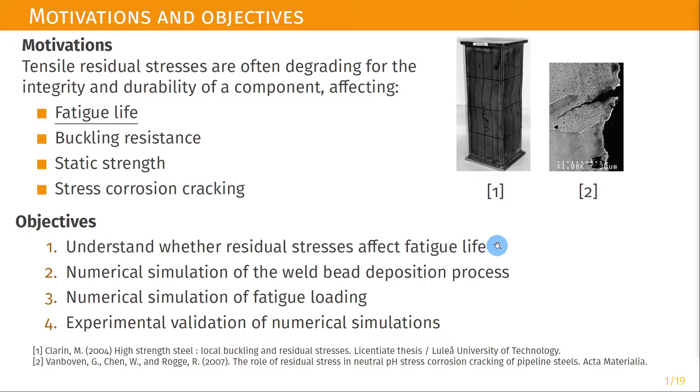In the following, two case studies will be presented: a welded joint and a notch specimen. In both cases, the effect of residual stresses on fatigue life will be investigated. Specifically for the welded joint, both numerical models and experimental results will be presented. On the contrary, for the notch specimen, only some experimental results are available up to now.

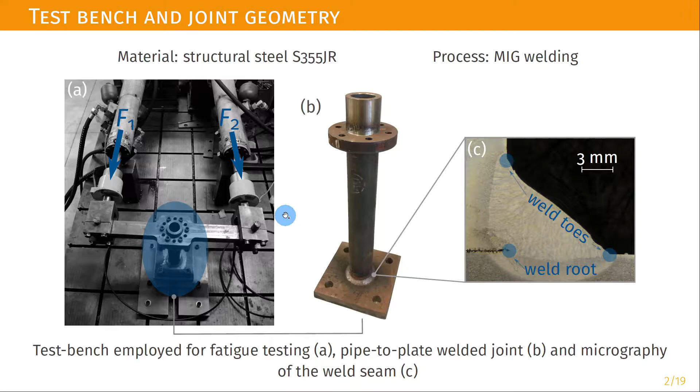Fatigue tests were carried out by means of a homemade test bench with two independent actuators, so we could create pure bending, pure torsion, or a mix of them. For this research project, we are dealing specifically with fully reversed pure torsion and pure bending loading.

In order to study the effect of residual stresses, it was necessary to relieve some specimens. For this reason, a temperature of 630 degrees was maintained for 4 hours with subsequent cooling in the oven. Hardness and microstructure were analyzed to ensure correct treatment.

In this graph, you can see the hardness curves around the weld seam region, both for as-welded and stress relief specimens. The hardness values were plotted over a normalized indentation distance, the definition of which can be observed at the top left corner of this figure. As can be seen, the hardness decreases after the heat treatment and settles down to values traditionally expected for a stress relieving process of structural steel.

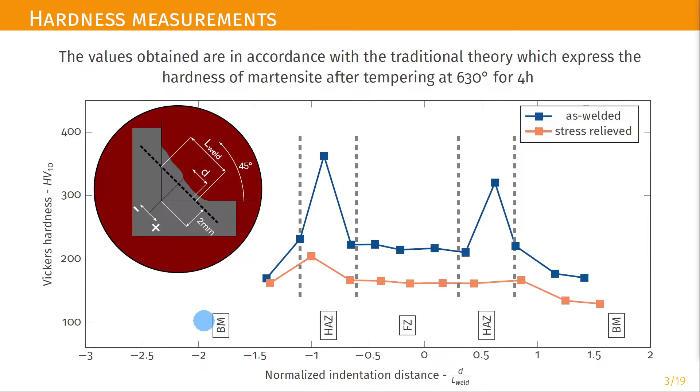For the sake of clarity, only hardness measurements have been presented here. However, even from a microstructural point of view, differences were found due to the thermal process, in particular grain coarsening close to the weld seam region.

Alongside the fatigue test, a numerical model was developed to determine the residual stresses that arise as a result of the welding process. The model uses an uncoupled thermo-structural simulation, as you can see from the first two images: the thermal analysis and the structural analysis.

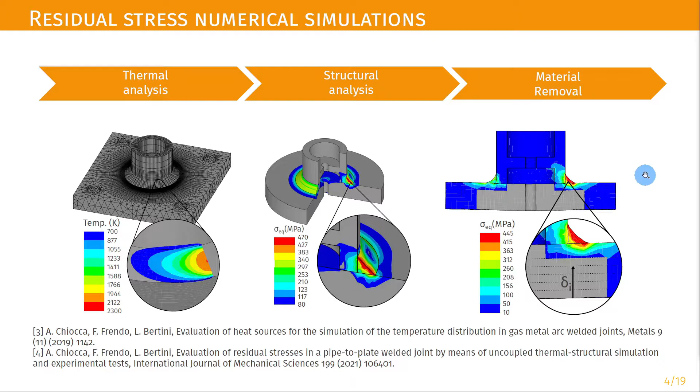This was followed by a material removal model to confirm the correctness of the results. Basically, results of relaxed strains around the weld seam were compared numerically and experimentally. These strains were experimentally measured using strain gauges and by incrementally drilling the specimen from the bottom of the plate after the welding process.

To simulate the thermal load deriving from the welding process, a constant initial temperature method was implemented. The thermal process was initialized by activating a volume of elements at a starting temperature Ti, which is the only parameter this method needs to work properly.

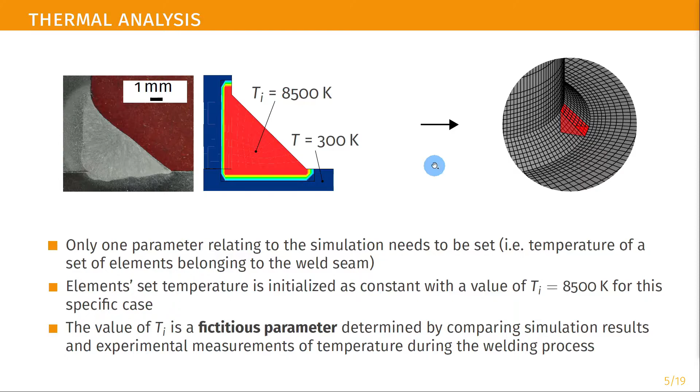The value of Ti was set for this particular case at 8500 Kelvin. This value has been obtained from the comparison of experimental and numerical temperature results, by directly calculating temperature around the weld bead. Specifically, Ti does not represent the melting temperature of the base metal, but instead is a fictitious parameter that incorporates all the assumptions that this model includes.

The use of a constant initial temperature method in the thermal simulation poorly matched the classic approach of sequential activation of all the elements belonging to the element set. For this reason, a more representative simulation of the welding process from a structural point of view was implemented in this case. A correlation between element activation and element temperature is added.

From the figure, it's possible to identify a sequential activation of the elements with a temperature lower than the melting point. The result thus obtained represents what is expected from the solidification of a pool of molten metal during the welding process.

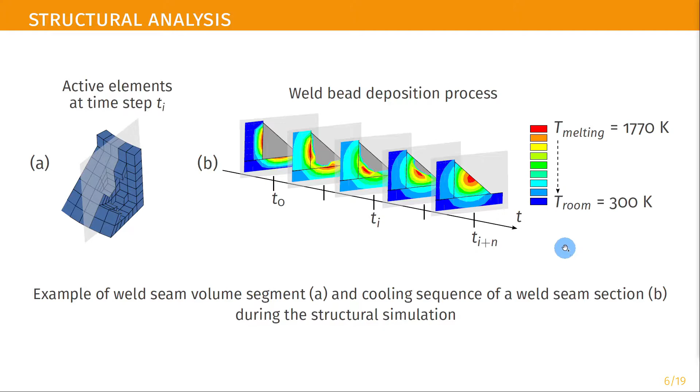Element's activation is gradual, even within the same section, and better describes the correct solidification of the material. The importance of using a three-dimensional numerical model is proven by the results of radial and hoop stresses.

These graphs show the stress behavior at the end of the welding process, specifically on the upper plate surface. The results of radial and hoop stresses are shown starting from the weld toe here up to the end of the plate. It is clearly visible a drop in both radial and hoop stresses near theta equal to 0, this angle here, where theta represents the run-in run-out point. This is precisely the area affected by the double thermal cycle, where the welding process begins and ends.

It is worth noting that the values of stress, especially the radial one, are significant, with a value around 500 megapascal close to the weld toe. This is because of the simplifying assumption of a null radius for the weld root and weld toe.

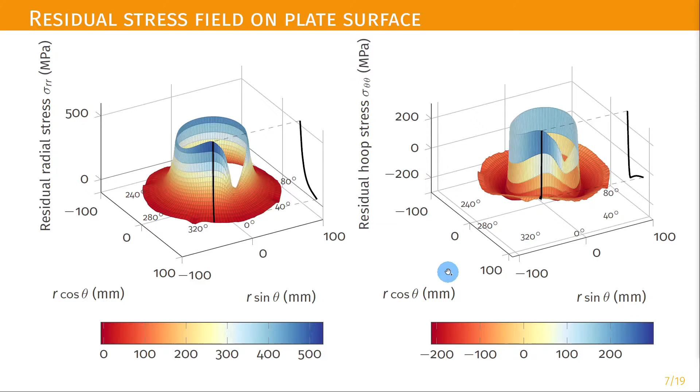The magnitude of residual stresses produced is quite considerable in this case. They indeed reach values around the yield strength of the material.

Fatigue damage analysis was conducted numerically by means of a submodel analysis. A linear elastic model was firstly used to apply the correct sequence of loads and constraints, while the submodel with elastic plastic material behavior was used to obtain the structural values necessary for the calculation of damage factors.

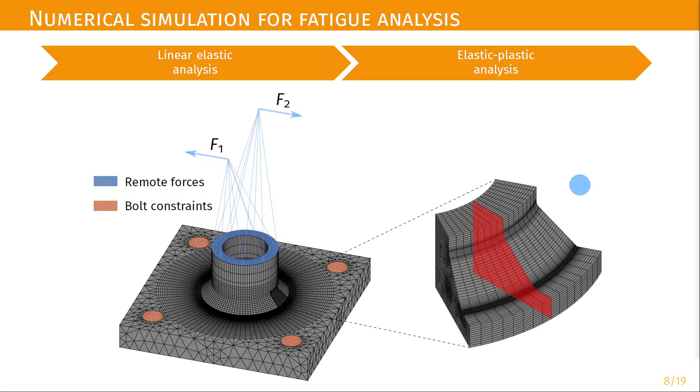In red is highlighted the critical section of the submodel. In this section, the critical plane factors have been calculated. It was found that the weld root was a critical location for both loading conditions, so for pure bending and pure torsion.

From a numerical point of view, residual stresses were mapped and initialized within the submodel. Both as-welded and stress-relieved conditions have in common the linear elastic and submodeling analysis. The only difference here lies in skipping the residual stress initialization phase with respect to the stress-relieved specimen.

It should be noted that radii of the weld root and weld toes have been included in the submodel. Radii have been derived directly from investigating cross-sections of the weld seam. As the derived radius of the weld root is 0.2 mm, its presence has a negligible effect on the initialization phase for the residual stresses, even if this is done directly within the submodel.

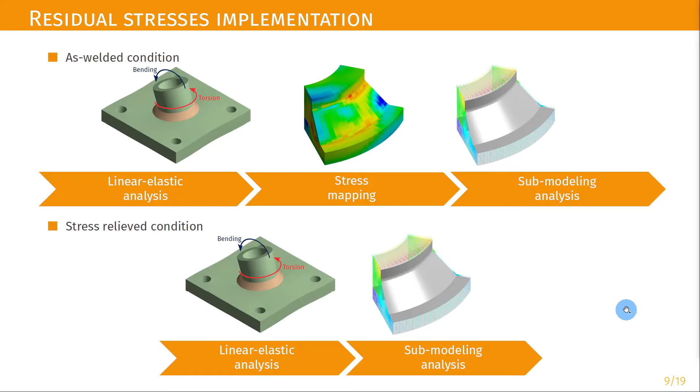In the following, I will present experimental and numerical results for the tube-to-plate welded joint.

Experimental results from pure torsion fatigue tests are shown here, specifically for as-welded and stress-relieved specimens. The nominal stress range is shown over the number of cycles to break through. For the sake of clarity, the FAT curve is also shown in order to have a comparison with standard.

It can be seen that data related to relieved specimens seems to have a longer service life. This is also shown from the expected versus experimental number of cycles to break through, where the stress-relieved data lay outside a factor 3 on the life range. It is worth noting that all points belonging to this graph, here at the top right corner, have been derived with reference to the fitting curve for torsion as-welded data.

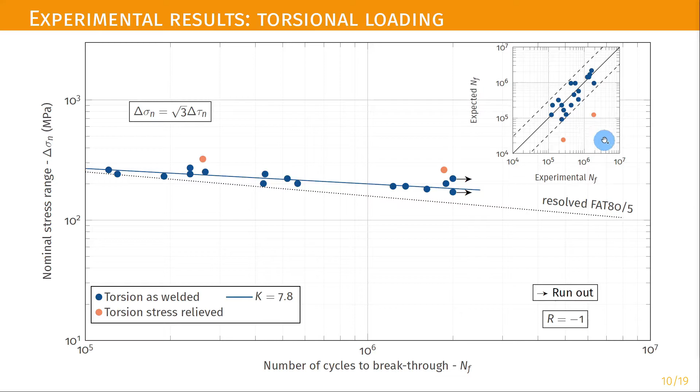Similarly, pure bending tests were carried out. Up to now, it was not found a significant difference between as-welded and stress-relieved specimens regarding the service life. In fact, as can be seen from the expected versus experimental number of cycles to break through, all stress-relieved data, together with the as-welded ones, fall within a factor 3 in the fatigue life range.

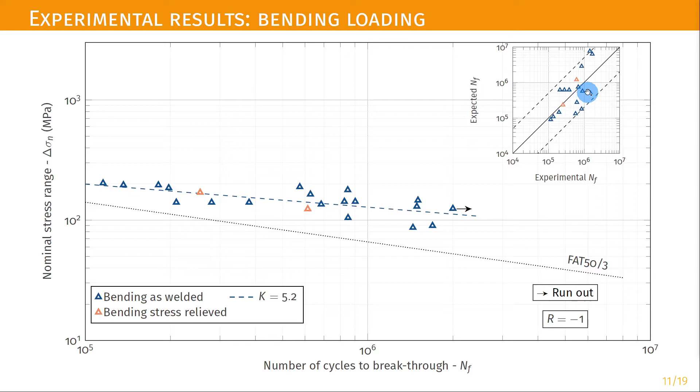So, what is presented here is the first numerical investigation where we tried to provide an answer to the different behavior between torsion and bending. First of all, damage was studied in the most critical point of the weld bead, in our case the weld root. The damage was calculated using critical plane factors.

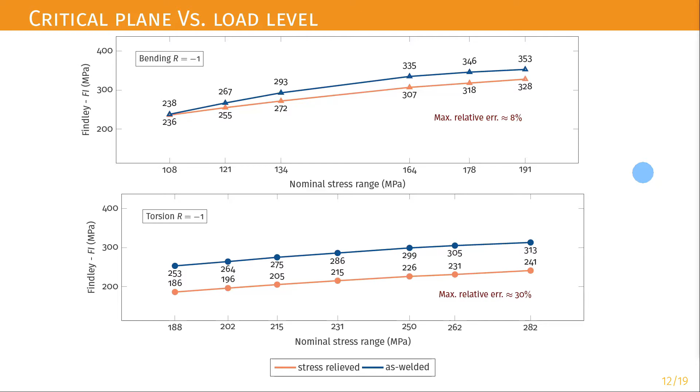Here is shown Findley's critical plane factor over the nominal stress range for pure bending and torsional loading respectively. For the sake of simplicity, the maximum relative error between stress-relieved and as-welded conditions is also shown. It is evident that under similar loading conditions, the relieving process decreases the amount of damage more for the pure torsion than for the pure bending loading.

One possible way of explaining the different behavior obtained in the two cases of torsion and bending was found in the hydrostatic stress. The pure torsional load does not provide a counterbalance for the hydrostatic stress, unlike the bending one. Therefore, we consider stress triaxiality as a damage factor.

Four stress triaxiality factors are here presented, specifically for pure torsion and pure bending in as-welded and stress-relieved welded conditions. As can be seen, in the absence of residual stresses and under pure torsional loading, the stress triaxiality is zero. On the other hand, if residual stresses are present, this will increase.

In the case of bending, on the other hand, there is no great difference between as-welded and stress-relieved conditions. An explanation could be that during pure bending loading, in the presence of notches, cyclic plasticity stabilized the material and removed part of the initial residual stresses, leading to similar stress triaxiality values.

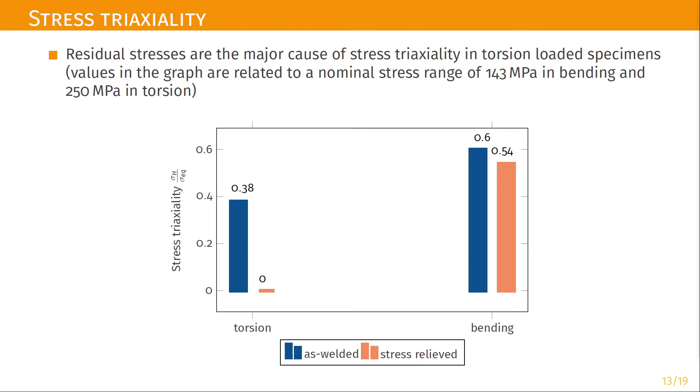I will present now an ongoing project that tries to reproduce the difference between pure bending load and pure torsional load in a more controllable environment.

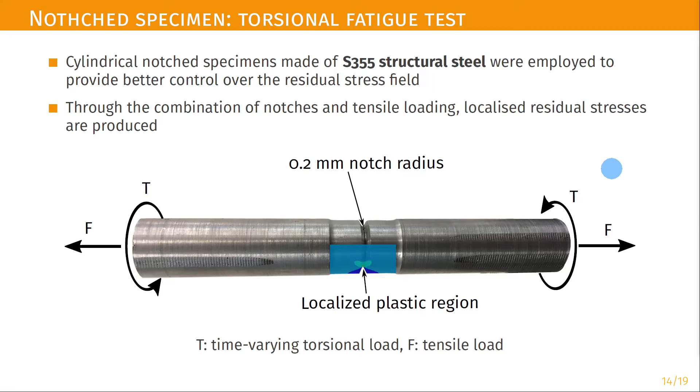For this purpose, notched cylindrical specimens made from the same structural steel as the welded joints were investigated. By means of an axial-torsion test bench, a tri-axial stress field can be established in the notch. By controlling the axial preload, the magnitude of these stresses can be changed and different loading scenarios can be investigated.

So the idea is to follow two different ways for doing the experimental test. In the first one, the test will be performed with a fixed preload that will be maintained during the fatigue test, while in the second one, the notch specimen will be stretched to locally go beyond the yield strength of the material in order to create residual tensile stresses in the region of the notch.

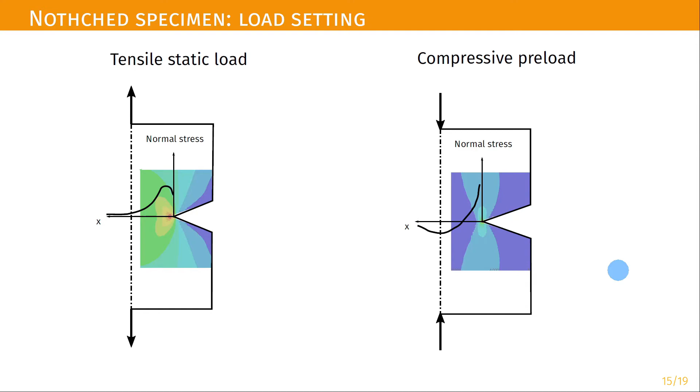In a similar way as for the welded joints, the aim here is to reproduce locally the stress state that is comparable to that produced in the weld seam, hence the choice of the notch specimen. This is in order to achieve the different behavior observed between torsion and bending that we saw before in the welded joint.

In the following, I will present the first experimental results for pure torsion with a static preload of 10 kN, thus keeping the specimen in the elastic region.

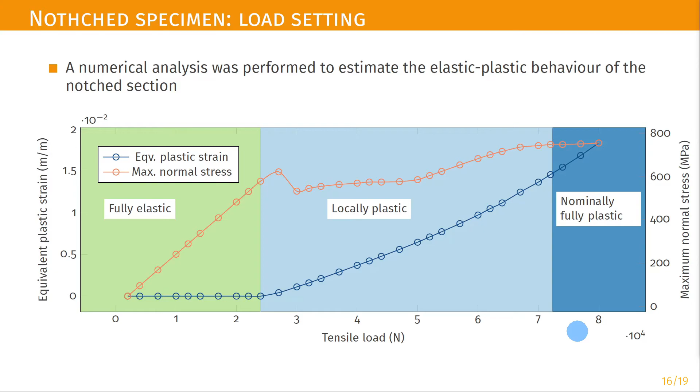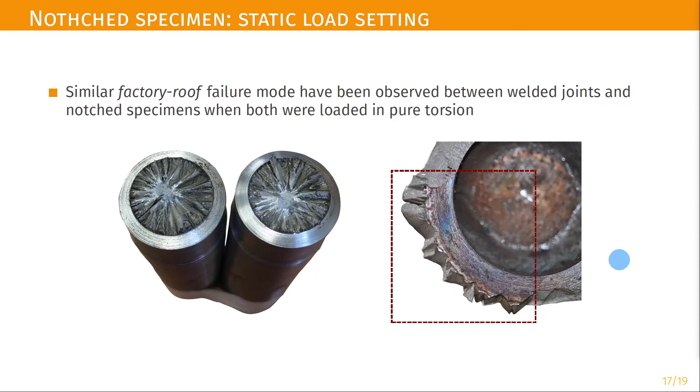What will be done as a future development is trying to achieve the fatigue behavior found for the bending loaded welded joint and translate this also for these notch cylindrical specimens.

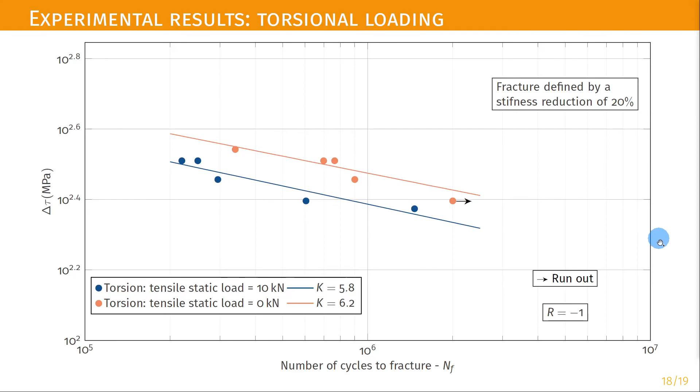To conclude, two case studies were described here. The first one is a welded tube-to-plate joint for which a numerical model was created specifically for the calculation of residual stresses deriving from the welding process. These stresses were then implemented in a numerical analysis for the calculation of fatigue damage factors.

As a result, a difference was found between pure torsion and pure bending fatigue behavior. Recently, an experimental campaign on notch cylindrical specimens was started in order to better explain the causes behind the different behavior found for the welded joints.

With cylindrical specimens, it is possible to better control the imposed stress field, thus eliminating the variability of the residual stresses resulting from the welding process.